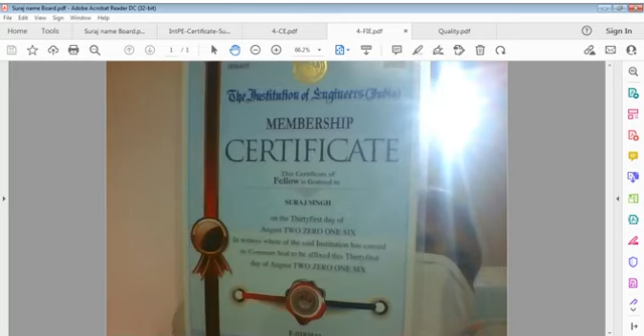Quality means life, I consider it as life. I am very serious about the issue of quality because for me it is not very different. It is also not very different for you, because everybody must be interested in quality achievement, quality system and quality.

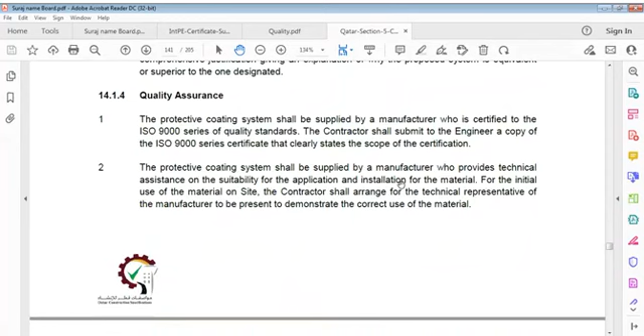It is essential. I am talking of my country, that is Bharat, India. I am talking about that.

Though I have worked overseas for many years, that's a fact. And it's also a fact that I learned a lot about quality only in my career when I worked overseas. I worked in Iraq, in Libya, in Gulf countries, and I know what quality means. I also worked in my country and I know what level of quality we have or had.

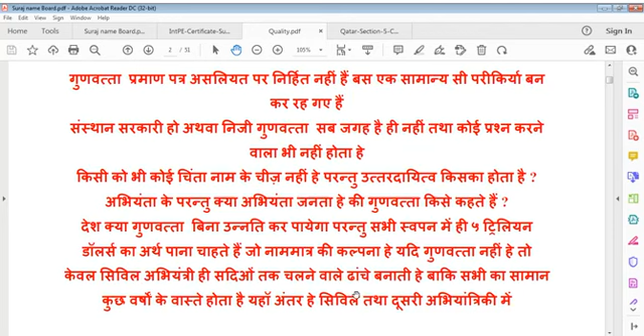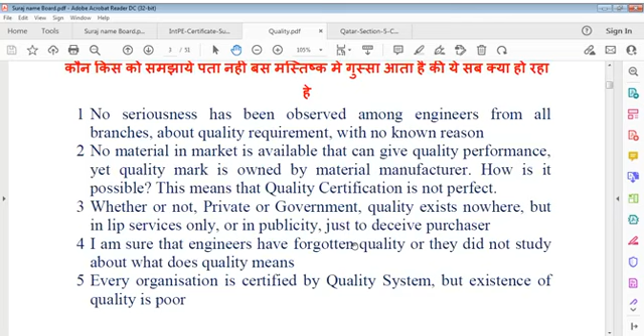And that's where we should feel it, we should understand it. And ultimately, I would say engineers have to change themselves. I sometimes feel very angry. I think I am angry many times, but I cannot do anything. It's the whole nation and engineers who have to think.

Just conducting seminars, webinars, congresses won't work. These are instant. Just showing your research results won't work. If this can't be implemented and adopted by everybody, your journals won't work and your speeches won't work if this can't be transformed to reality.

I don't care for certification now because certification is not the final answer. The product should speak. Previously we used to say, okay, this certification doesn't guarantee product quality. It doesn't guarantee. Okay, I agree with that. But why doesn't it guarantee? That's the question.

Why can't it guarantee quality? You can say this is not in our control, that's beyond our control. What is your control then? What's the purpose of quality certification? Just a certified system, and the system involves human resources, material resources, and many other resources. So what is this certification for? Is it futile certification, or is it only symbolic? If it's symbolic, then I don't think it gives something. It should be a real one. It happens.

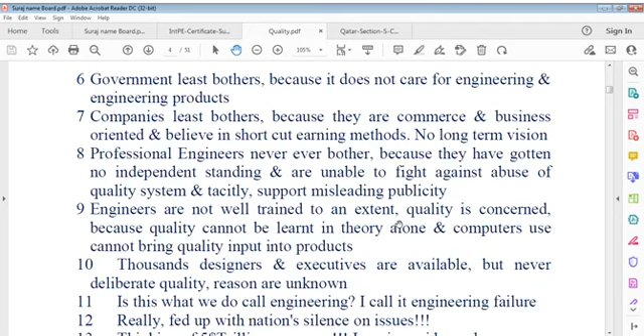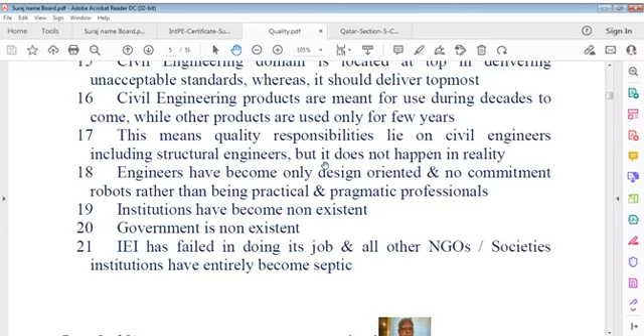Like safety, health, and environment, quality is on top of that. We cannot play with people, the same way we cannot play with materials, we cannot play with anything. Sorry, I'm not wasting your time. It is not material alone, it's not your engineering domain alone, quality lies everywhere in life. It lies in your conduct, it lies in your behavior, it lies everywhere. And that's why I say we have to think about quality in all ways.

And it is retrieved only when you are sharp in memory, or your communication that is inside comes out, or you interact with others, other disciplines, other professionals, whosoever they are, that is through communication. And when you deal with many communications, many parameters, many techniques, many requirements, you have to talk to them, you have to think about them together to get the final result, final requirement. And this process, you can say interactive process, intertechnical process, interstructural process, or inter-requirement process, all combined together in a string, can be termed the process of coordination.

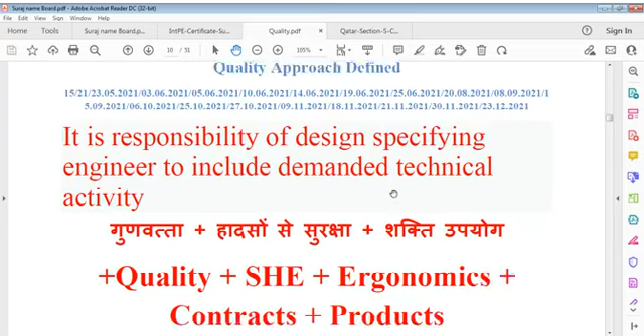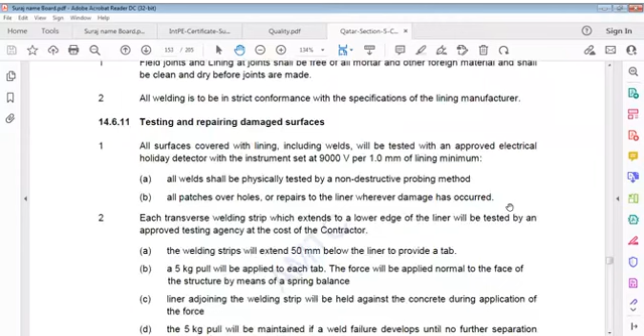Contracts and specifications technically are same. I was talking about concrete, which is very important material in construction world, in engineering, and we have applications, and we talked all this. I'm just trying to browse it to reach that page. We left last time, I think hot weather concreting we're talking of, and we reached somewhere.

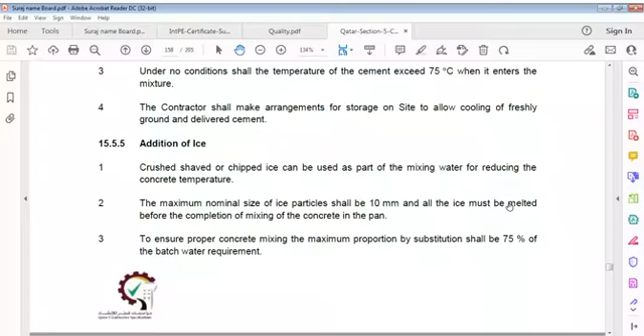Mix design, temperature controls with it, and addition of ice, liquid nitrogen, batching and mixing, transportation, placing and finishing. You can say curing and protection. So let's start again from there. Let's start from this page so that we can refresh also.

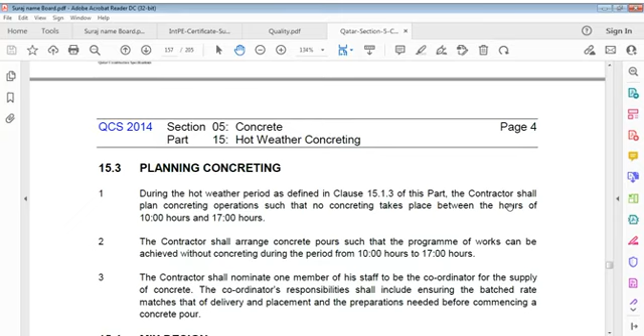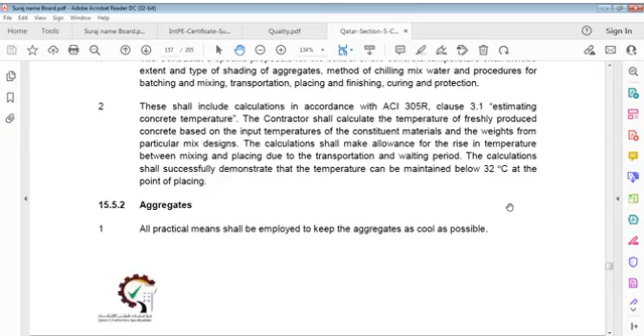We did planning of concrete, of course we did. We fixed time with 10 hours and 17 hours, we remember that. Then mix design, we did temperature controls, so water, cement, and we can say liquid nitrogen, we did batching and mixing. Like we can start from here, I think. Batching and mixing we did. Transportation, curing and protection, curing.

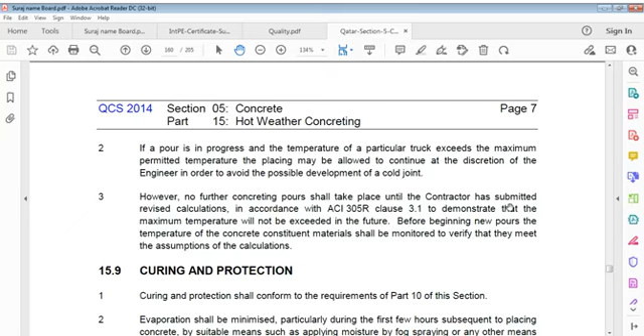Liquid nitrogen. Let us start from here. Freshly mixed concrete. Freshly mixed concrete may be cooled by injection of liquid nitrogen.

Care shall be taken to ensure that concrete directly adjacent to the injection nozzle is not frozen. Use of liquid nitrogen for cooling concrete includes a nitrogen supply vessel, an injection facility for batching plant, or one or more injection stations for truck mixers. System may be set at site for injection just before placing. Proper safety precautions as advised by the supplier of liquid nitrogen shall be used.

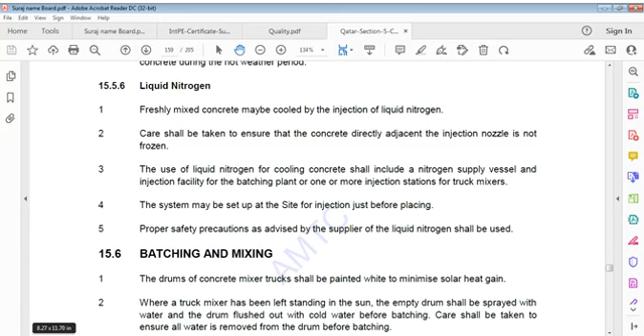Shall be painted white to minimize solar heat gain. Where a truck mixer has been left standing in sun, empty drum shall be sprayed with water and drum flushed out with cold water before batching. Care must be taken to ensure all water is removed from drum before batching.

Temperature of concrete shall be checked after discharge from mixer and written on delivery ticket. Temperature check shall be conducted or carried out at plant on concrete floor for every 50 meter cube produced or every hour, whichever is minimum.

A water reducing set retarding chemical admixture, conforming to requirements of BS EN 480 parts 1, 2 and 4, may be used in varying proportions.

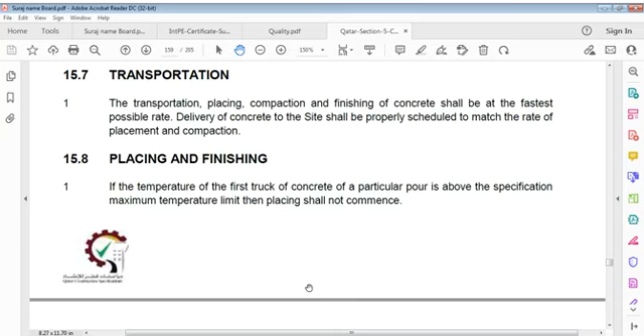Placing and finishing: if the temperature of the first truck of concrete of a particular pour is above the specified maximum temperature, and if pour is in progress and temperature of a particular truck exceeds the maximum permitted temperature, placing may be allowed to continue at the discretion of the engineer in order to avoid possible development of a cold joint.

However, no further concreting pours shall proceed until the Contractor has submitted revised calculations in accordance with ACI 305R clause 3.1 to demonstrate that the maximum temperature shall not be exceeded in future. Before beginning new pours, the temperature of concrete and constituent materials shall be monitored to verify that they meet the assumptions of the calculation.

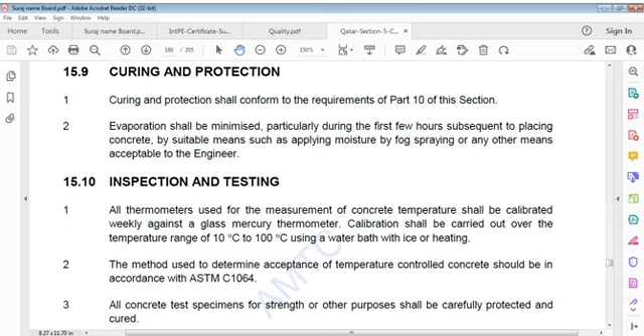All concrete test specimens for strength or other purposes shall be carefully protected and cured. Specimens shall be protected from accidental damage by plant personnel or equipment on site, and kept moist by addition of water or covering with suitable curing materials. The exact time of preparation of the specimen on site shall be noted, along with the time it is transferred to the laboratory, and this time shall be written on the test report.

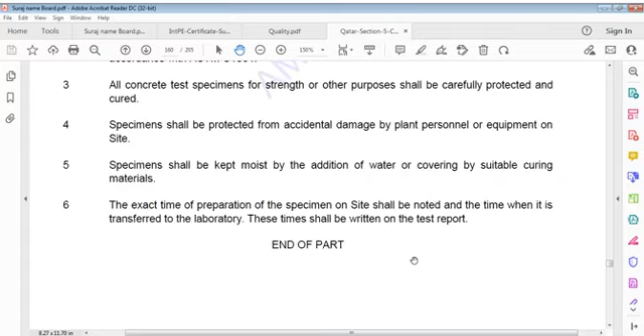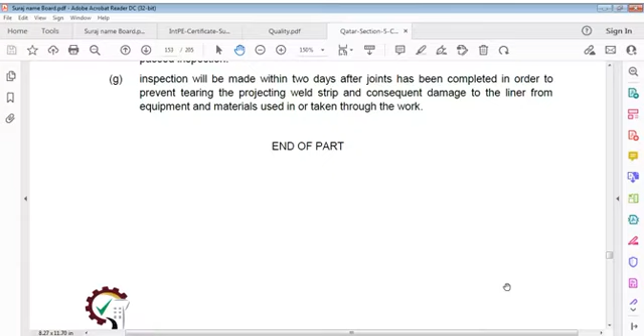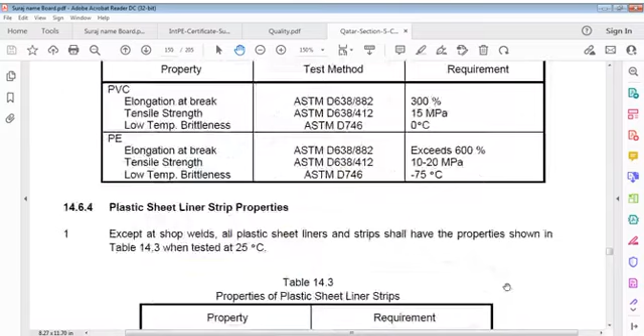Let's refresh: this was hot weather concreting, and before that something else, which was also hot weather concreting. In this we covered protective treatment of concrete, which we did, and also covered other items here.

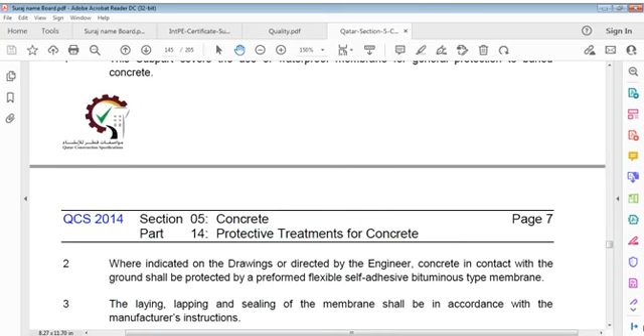We covered epoxy coating, surface treatment, and waterproofing membrane. Then we covered penetrative primer, protective coating again, and plastic sheet liner for concrete structures, including plastic sheet liners.

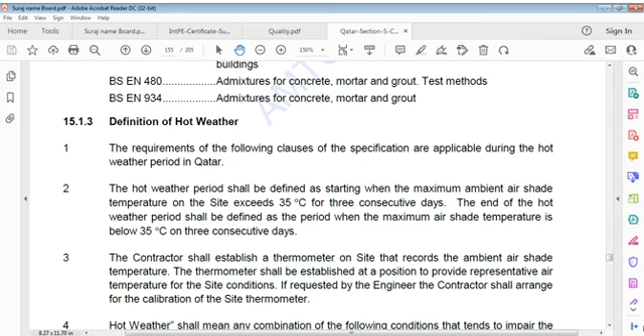Then we covered hot weather concreting: its scope, and the hot weather condition where temperature ranges between 32 and 35 depending on shade temperature. We understood ambient temperatures in shade above 40 on a rising thermometer and 43 degrees on a falling one, and what constitutes high temperature and system descriptions.

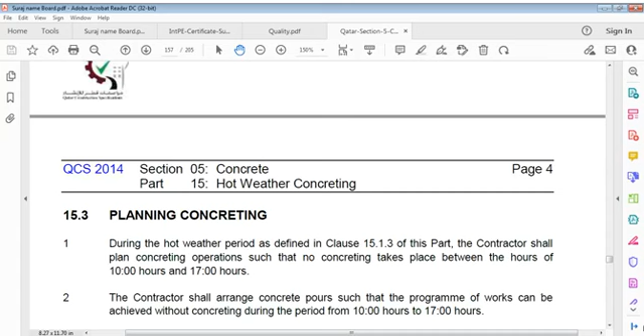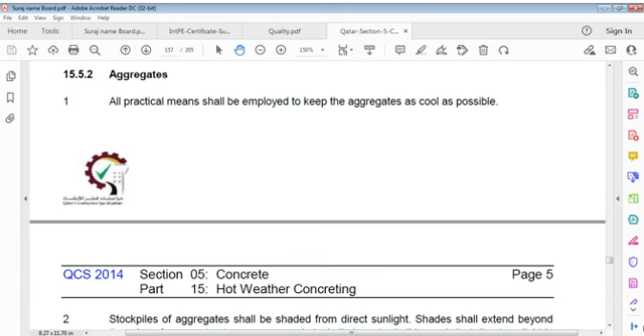We also tried to understand placing temperature, how to plan concrete, mix design, temperature controls, batching and mixing, transportation, placing and finishing, curing and protection, and inspection and testing, as we covered.

We go to miscellaneous, concrete miscellaneous now.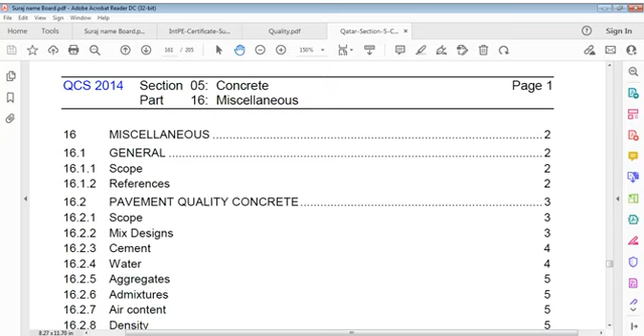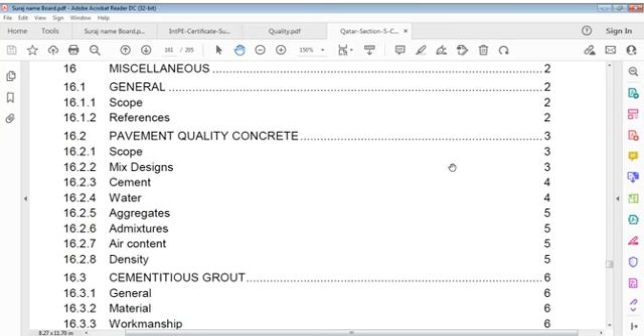In this section: general scope and references, pavement quality concrete, its scope, mix design, cement, water, aggregate, mixture, admixture, air content, density, and general material workmanship. This also covers channel and cellular concrete, repair of concrete including honeycombing or spalling, crack injection, polished resin concrete (PRC), and piping systems for non-pressure drainage and sewerage, including general resin minimum strength.

So what is miscellaneous in this? It says this part deals with miscellaneous items related to concrete works, including pavement quality concrete, no fines concrete, lightweight concrete, cementitious grout, screeds, repair of concrete, and guniting. So there are many items involved in this.

Pavement quality concrete - what is that? Pavement quality, no fines concrete, lightweight concrete, cementitious grout, screeds, repair of concrete, and guniting.

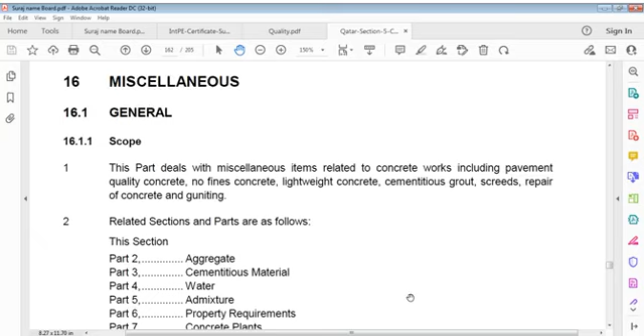In this specification we have part 2 aggregate, part 3 cementitious material, part 4 water, part 5 admixture, part 6 property requirements, part 7 concrete plants, part 8 transportation and placing of concrete, part 9 formwork, part 10 curing, and part 15 hot weather concreting.

We have gone through all this from part 2 to part 15 in this chapter, in this specification. And we are going to references in this guide.

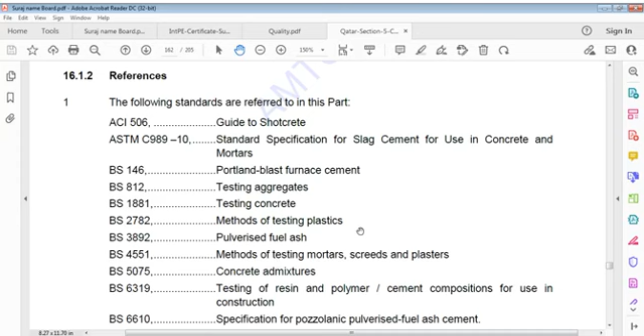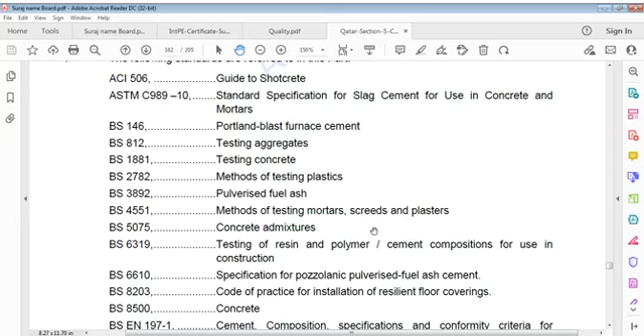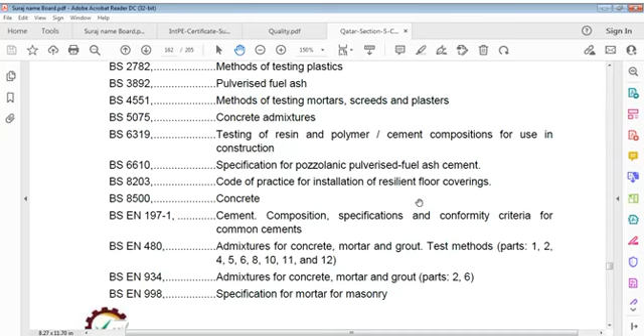References include shotcrete, standard specification for slag cement for use in concrete and mortars, Portland blast furnace cement, testing aggregate. Of course I am not reading all references, you can read yourself, it's already there. Also testing concrete, methods of testing plastics, pulverized fuel ash, methods of testing mortars, screeds and plasters, concrete admixtures, testing of resin and polymer, cement compositions for use in construction, specifications for pozzolanic pulverized fuel ash cement, code of practice for installation of resilient floor coverings.

Concrete cement composition specifications and conformity criteria for common cements, admixtures for concrete, mortar and grouts, test methods parts 1, 2, 4, 5, 6, 8, 10, 11, 12, admixtures for concrete, mortar and grout part 2 and 6, specifications for mortar.

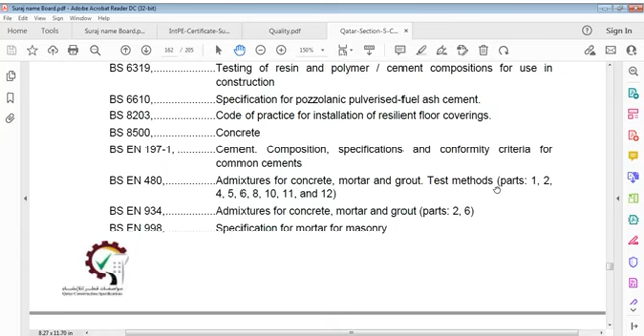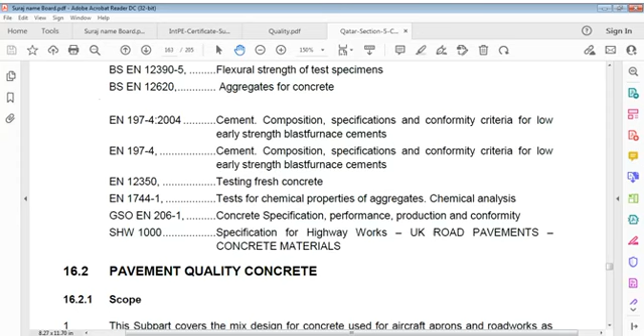Testing fresh concrete, flexure strength of test specimen, aggregate for concrete, cement composition, specifications and conformity criteria for low early strength blast furnace cements, testing fresh concrete, tests for chemical properties of aggregates, chemical analysis, concrete specification, performance, production and conformity, specification for highway works, quality concrete.

What is the scope here? It covers mix design of concrete used for aircraft aprons and roadworks as surface slabs, continuously reinforced concrete road base, and wet lean mix, except cement bound granular material used as road base or sub base or as a backfill material for excavation.

I repeat, this part covers mix designs for concrete used for aircraft aprons and road works as surface slabs, continuously reinforced concrete road base, and wet lean mix, except cement bound granular material used as road base or sub base or as a backfill material for excavations.

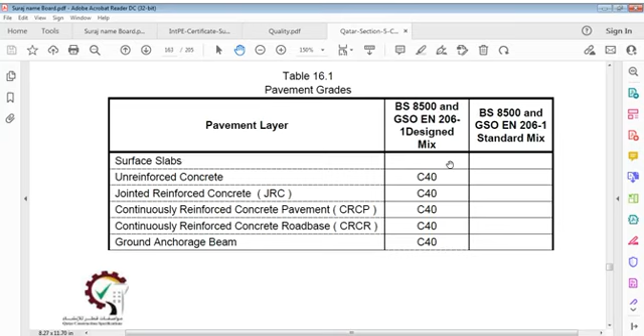Rapid construction with approval of engineer, and here are the pavement grades. Surface slab, this is a pavement layer, and according to BS 8500 and GSO EN 206-1 it is a designated design mix, or BS 8500 and GSO EN 206-1 standard mix.

Now let's see what surface slab is. This layer is C40, unreinforced concrete. This is only for surface slab, and unreinforced concrete is C40. Then jointed reinforced concrete.

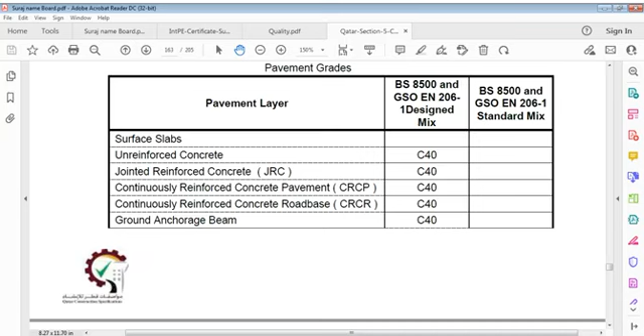Jointed reinforced concrete C40. Continuously reinforced concrete pavement, CRCP, C40. Continuously reinforced concrete base C40, and ground anchorage beam C40.

Same way we can say, then there is wet lean mix concrete 4, which is C20, or the standard mix ST4. Wet lean mix concrete 3 is C15 ST3, wet lean mix concrete 2 is C10 ST2, and wet lean mix concrete 1 is C7.5 ST1. So we can say we start from 1 at C7.5, and it goes to mix concrete 2 at C10, then 3 is 15 and 4 is 20. You can say something likewise.

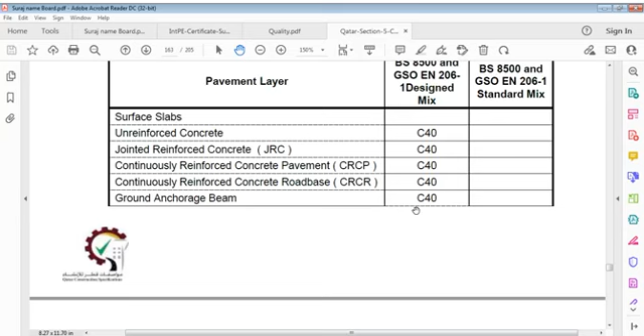These are different grades for pavement, four standards for pavement here. As we said, there's nothing unusual in that: C40 all up to ground anchorage beam — unreinforced concrete, jointed reinforced concrete, continuous reinforced concrete pavement, continuous reinforced concrete road base, ground anchorage beam — and for the pavement layer, wet lean mix concrete 4th one, C20 down to 7.5.

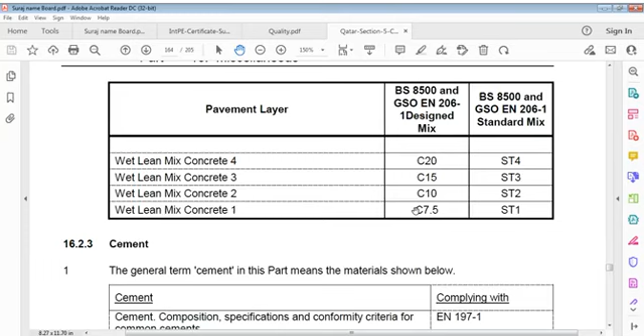Now what is cement in general? The general term cement in this part means the materials shown below: cement composition specifications and conformity criteria for common cements EN 197-1, Portland blast furnace cement BS 146 or EN 197-4, specification for pozzolanic pulverized fuel ash cement, and pozzolanic pulverized fuel ash cement grades C20 or below BS 6610.

Use of a combination of Portland cement and pulverised fuel ash is permitted, subject to approval of engineer. In such cases, the engineer stipulates the minimum combined cementitious material content required for the mix.

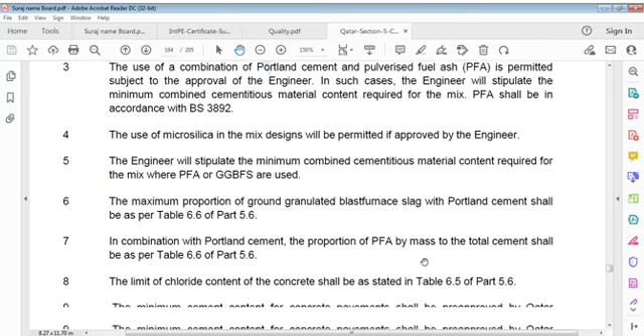Use of microsilica in mix designs is permitted if approved by the engineer. The engineer shall stipulate the minimum combined cementitious material content required for the mix where PFA or GGBFS are used.

Maximum proportion of ground granulated blast furnace slag with Portland cement shall be per table 6.6 of part 5.6. In combination with Portland cement, proportion of PFA by mass to total cement shall be according to this table 6.6.

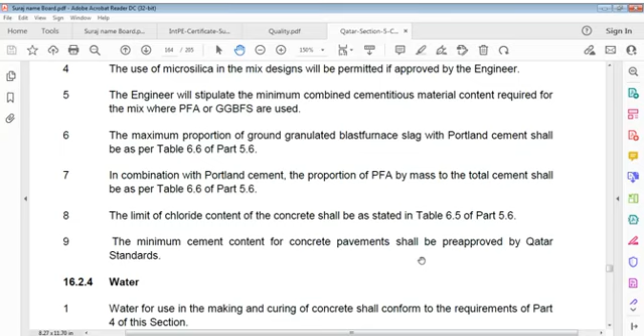Limit of chloride content of concrete shall be per the table. Minimum cement content for concrete pavements shall be pre-approved by Qatar standards or local standards of our country.

Water for use in making and curing of concrete shall conform to requirements of Part 4. Water content shall be minimum required to provide agreed workability for full compaction of concrete to required density, as determined by trial mixes or other means approved by engineer.

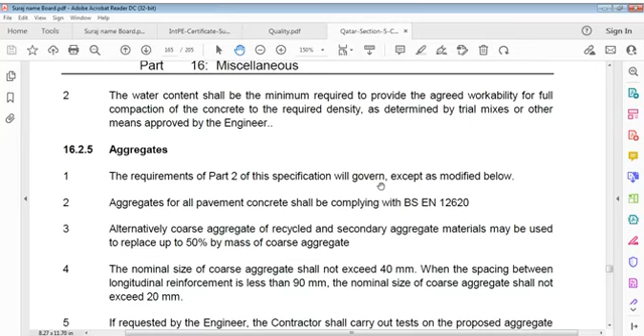Aggregates shall comply with requirements of part 2 of this specification, except as mentioned below. Aggregates for all pavement concrete shall be complying with BS EN 12620.

Alternatively, coarse aggregate of recycled and secondary aggregate materials may be used to replace up to 50% by mass of coarse aggregate. Nominal size of coarse aggregate shall not exceed 40 mm, or shall not exceed 20 mm when spacing between longitudinal reinforcement is less than 90 mm. Nominal size of coarse aggregate shall not exceed 20 mm.

If requested by engineer, contractor shall carry out tests on proposed aggregate combination to check for possibility of alkali silica reaction. Such tests shall be carried out in accordance with procedure laid down in part 2.

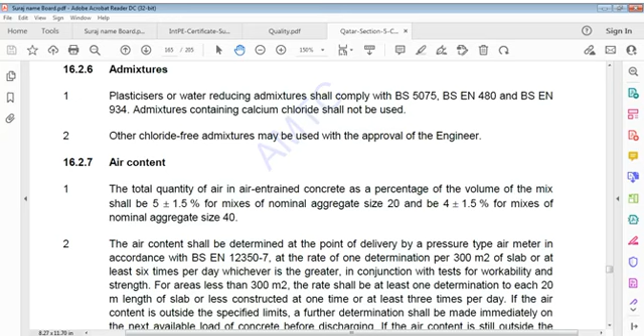If air content is outside specified limits, a further determination shall be made immediately on next available load of concrete before discharging. If outside limit, contractor shall immediately adjust air content of concrete to improve its uniformity before further concrete is used in works.

Air entraining agent shall be added at mixer by an apparatus capable of dispensing correct dose within tolerance of admixture given in EN 206-1, and so as to ensure uniform distribution of agent throughout batch during mixing.

Density of concrete grades greater than C30 shall be such that without air entrainment, total air voids are not more than 3%. With air entrainment, total air voids shall be not more than 8% for 20 mm aggregate, or 7% for 40 mm aggregate.

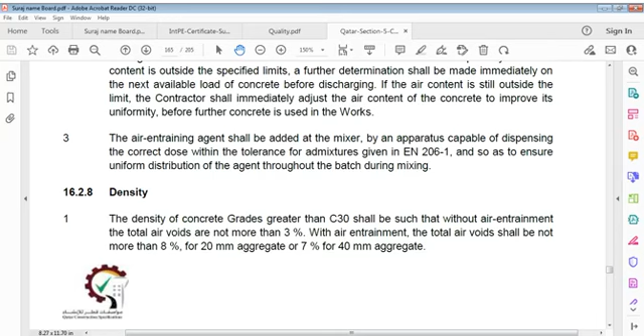Density of concrete grades B15 and B20, mix ST4 or below, shall be at least 95% of theoretical maximum dry density.

Cementitious grout. This subpart covers a general purpose non-shrink cementitious grout. Grout shall be used where it is necessary to eliminate shrinkage when filling voids between a base plate and a substrate, such as grouting of stanchion bases.

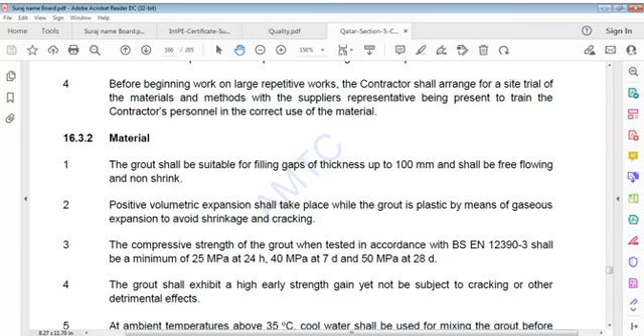At ambient temperatures above 35 degrees Celsius, cool water shall be used for mixing grout before placing.

Workmanship: storage, handling and pouring of grout shall be in strict accordance with manufacturer's instructions. Substrate surface shall be free from all oil, grease, or loose or partially bonded material.

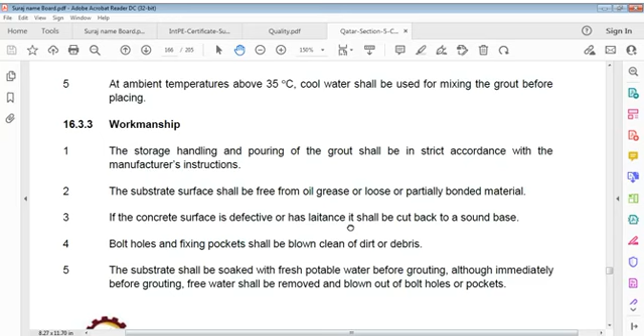Grout shall not be placed in a gap of less than 25 mm for base plates larger than 1 meter wide. For larger base plates of low area, manufacturer instructions shall be followed.

Base plates and metallic items shall be clean and free from oil, grease or scale. Vent holes shall be provided to allow release of air from isolated spots.

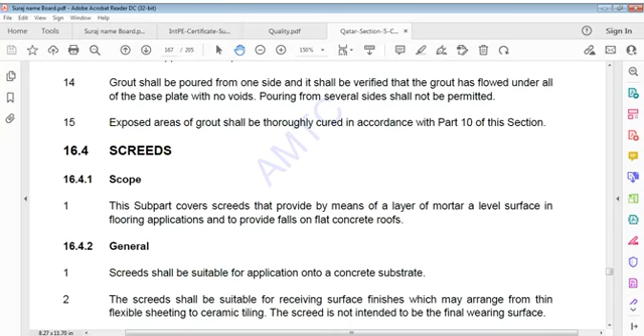Screed mortars shall generally comprise sand and cement modified by additives or substituted by other materials such as polymers, in order...

For screeds of thickness greater than 40 mm, it is permissible to incorporate a proportion of 10 mm aggregate. Screed mortar shall generally comprise sand and cement modified by additives or substituted by other materials such as polymers, in order to provide specific performance requirements.

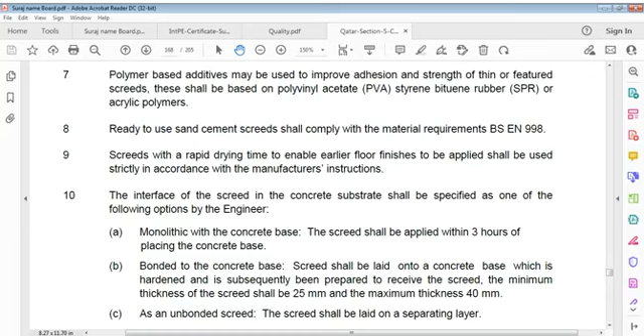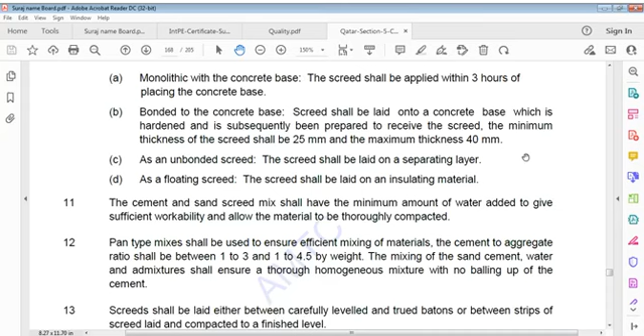As an unbonded screed, it shall be laid on a separating layer. As a floating screed, it shall be laid on an insulating material.

Cement and sand screed mix shall have a minimum amount of water added to give sufficient workability and allow the material to be thoroughly compacted.

Pan type mixers shall be used to ensure efficient mixing of materials. Cement to aggregate ratio shall be between 1 to 3 and 1 to 4.5 by weight.

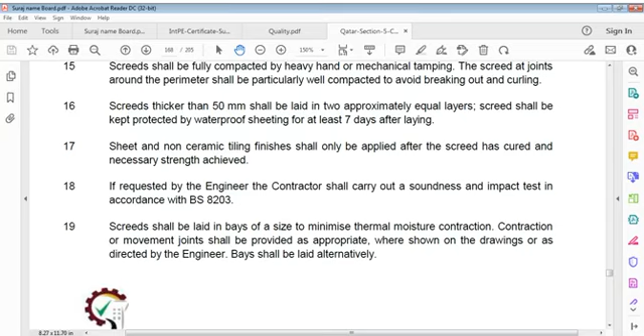Bay size shall be laid approximately 15 meters square for 100 thick screed, and 12 meters square for 75 thick.

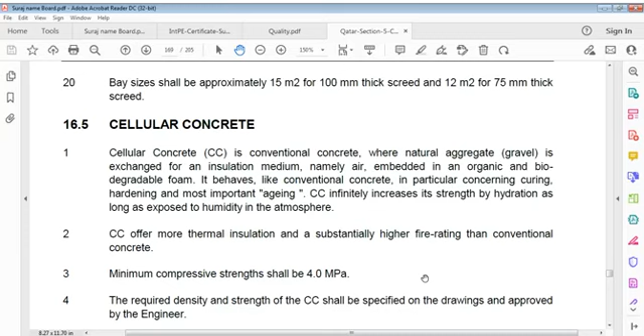Cellular concrete is conventional concrete where natural aggregate, that is gravel, is exchanged for an insulation medium, namely air, embedded in an organic and biodegradable foam.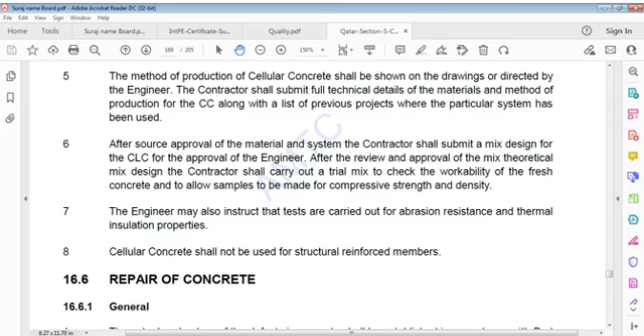Extent and nature of defects in concrete shall be established in accordance with part 15 of this section. Based on these results, engineers shall confirm acceptability of work and whether remedial works are required. If remedial works are required, contractors shall submit a detailed method statement identifying specific materials to be used and sequence of activities for repair. Only proprietary proven materials that form part of a standard repair system shall be used.

Honeycombing or spalling. So in general, extent and nature of defects in concrete shall be established in accordance with Part 15. Based on these results, engineers shall confirm acceptability of work and whether remedial works are required. If remedial works are required, contractor shall submit a detailed method statement identifying specific materials to be used and sequence of activities for repair. Only proprietary proven materials that form part of a standard repair system shall be used.

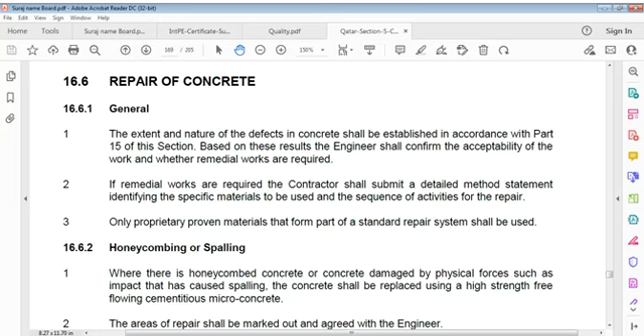Area of repair shall be marked out and all honeycombed, loose, cracked, or friable concrete in these areas shall be removed until sound concrete is reached. Due account shall be taken of propping or other instructions given by engineer regarding sequence of removal and repair.

Equipment and methods used to break out concrete shall be such that no reinforcing steel or other embedded items such as conduits, lifting sockets, or other inserts are loosened or damaged unless so directed by engineers.

Where removal of concrete by mechanical means is difficult due to reinforcement congestion, use of high pressure water jetting shall be considered, and necessary provisions for protecting the rest of the structure shall be made.

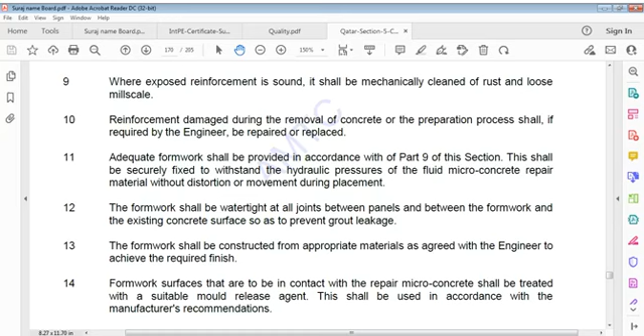Entry point of feed pipe into form shall be at the lowest point of void. Sufficient hydrostatic head or pumping pressure shall be maintained to ensure that the void is filled completely.

Entry point of feed pipe into form shall be at the lowest point of void. Sufficient hydrostatic head or pumping pressures shall be maintained to ensure that the void is...

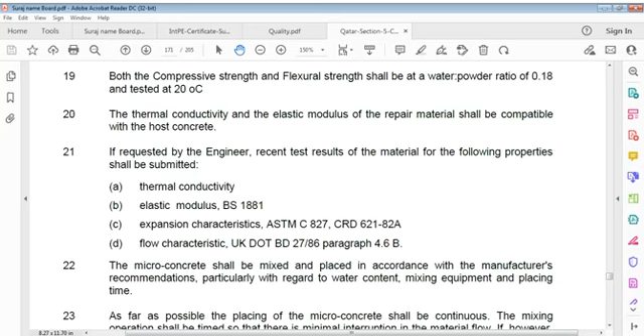Microconcrete shall be mixed and placed in accordance with manufacturer's recommendations, particularly with regard to water content, mixing equipment, and placing time.

As far as possible, microconcrete shall be mixed and placed in accordance with manufacturer's recommendations, particularly with regard to water content, mixing equipment, and placing time. As far as possible, placing of microconcrete shall be continuous, and the mixing operation shall be timed so there is minimal interruption in material flow. If, however, placing is interrupted, operations shall recommence as soon as possible while the repair material retains its flow characteristics.

Formwork shall not be removed until the repair microconcrete has achieved a compressive strength of at least 10 MPa, or as directed by engineers. Immediately after removal of formwork, the repair area shall be cured in accordance with Part 10 section.

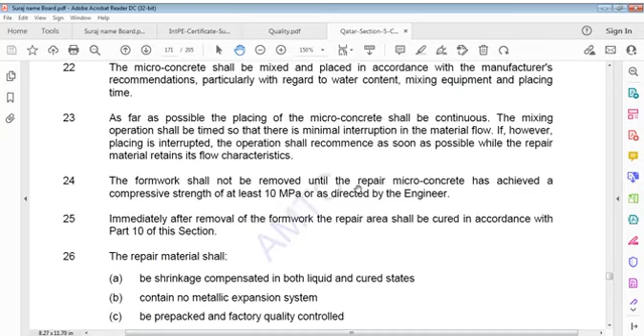Repair material shall be shrinkage compensated in both liquid and cured state, contain no metallic expansion system, and be prepacked and factory quality controlled, with a coefficient of thermal expansion fully compatible with host concrete, complying with the requirements of Table this one.

Property requirements of microconcrete: it shall be a free flowing cementitious material that has a coefficient of thermal expansion fully compatible with host concrete and which complies with the property requirements of microconcrete.

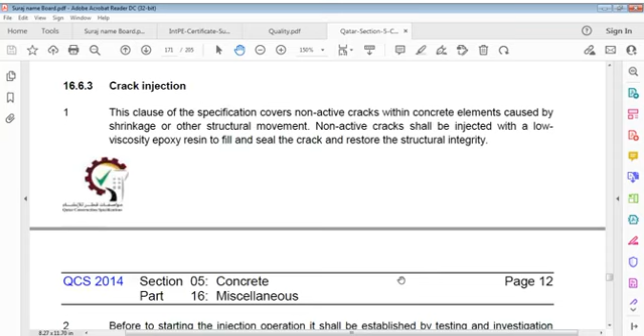Before starting injection operation, it shall be established by testing and investigation work that cracks manifest within concrete elements due to either or both shrinkage or structural movement are non-active.

Extent of cracks to be filled shall be directed by engineer. Cracks to be filled shall be marked out in detail on concrete elements by contractor and agreed with engineer before proceeding. Extent of work may be adjusted by engineer as project proceeds according to conditions found.

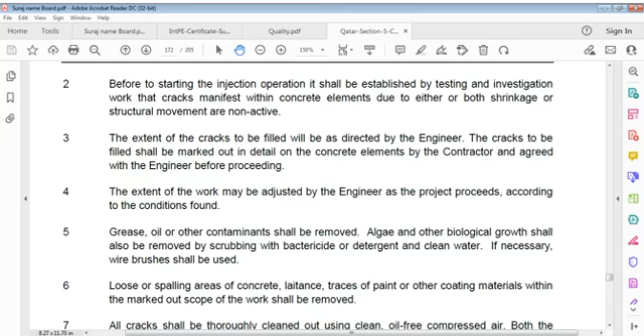All cracks shall be thoroughly cleaned out using clean, oil-free compressed air. Both concrete surface and cracks shall be allowed to dry thoroughly before continuing.

Injection nipples shall be fixed at intervals along the length of each crack. Distance between each nipple depends on width and depth of crack. Spacing shall be close enough to ensure that resin penetrates along the crack to the next point of injection. This normally be between 100 mm and 200 mm. Each nipple shall be firmly bonded to concrete surface by using a sealant.

Sealant shall be supplied in two parts, liquid base and hardener system. Two components shall be thoroughly mixed together for 3 to 4 minutes until...

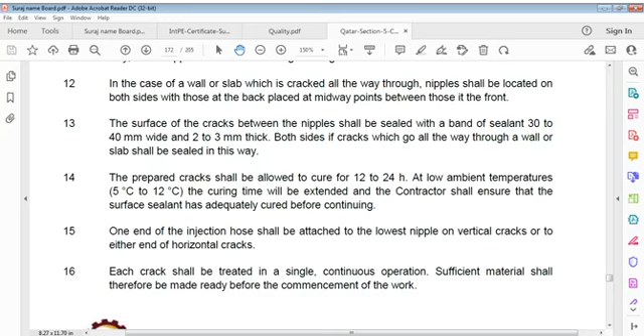Contractor shall ensure that sufficient cracks are prepared to provide effective use of mixed material.

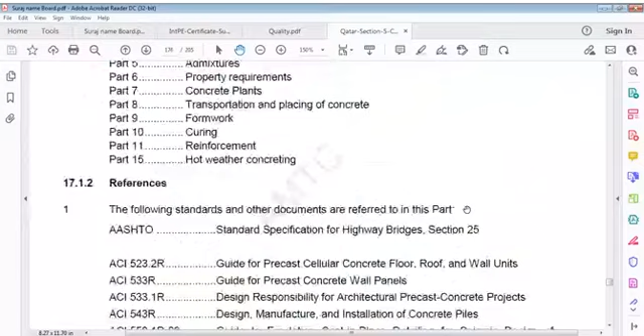We have gone through the requirements of this. That's an important one. And here we can say...